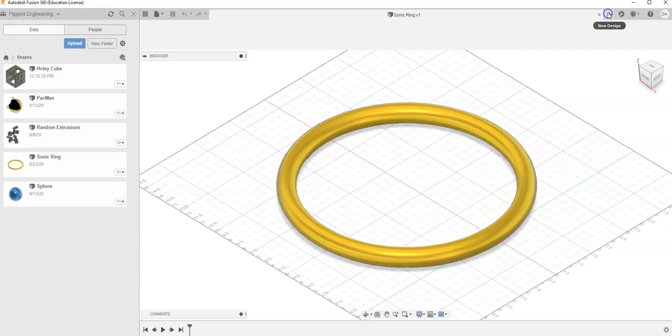We had some fun playing with the revolution tool in the last few videos, but let's go back to our extrusion tool and let's try to create a sword. So let's start a new document and let's start a new sketch. And I want to start with the blade of a sword. So I want to go with the top view.

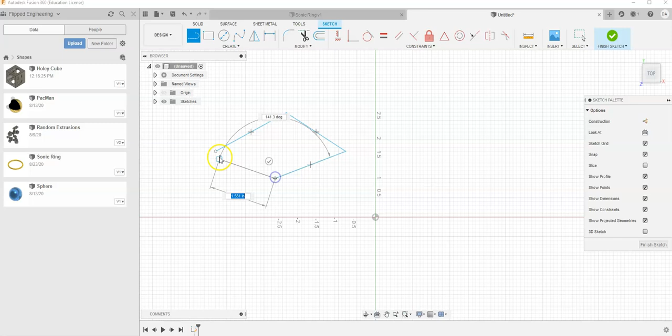And if you think about what the blade of a sword looks like from the top view, it kind of looks like a diamond shape. And so let's grab our line tool and let's sketch out a diamond kind of shape. And it doesn't matter if it's perfect, just make sure you connect it exactly on that last point at the end. Right click OK. And so if you look at my diamond, it's not perfect at all. But once we have the general outline drawn out, we're going to go ahead and make it perfect.

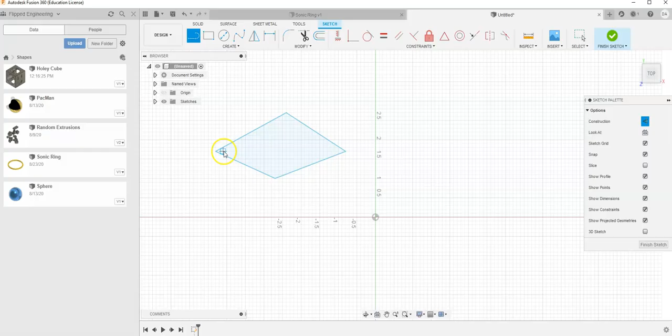And to do that, I'm going to introduce you to a new tool. It is called the construction line. So go ahead and click over here. Make sure you have your line tool still selected. And what I want you to do is I want you to connect from the left corner of my diamond to the right corner of my diamond with a construction line.

And you'll notice this construction line is not a solid line, it is a dotted line. And that's how you tell the difference between a construction line and what we call an object line or a normal line. And construction lines are actually really cool. What they do is they allow you to manipulate your 2D geometry without affecting your 3D features after you finish your sketch. And so let's draw one more construction line connecting the top corner of our diamond to the bottom corner. And then I'm going to right click and hit OK.

And the next thing I want to do is make sure that my lines are horizontal and vertical. And so I'm going to go to my horizontal and vertical constraints, and I'm going to click on my almost horizontal line and turn it horizontal. And you'll notice an error pops up. And this error pops up because it turns out that line was already perfectly horizontal. And so what it will do is either turn it horizontal or it'll tell you that it's already horizontal.

And so let's do the same thing with our almost vertical line. Let's turn it vertical. And so that one actually switched to a vertical line. And so again, if it was already vertical, it would just tell you it's already vertical, or it'll turn it vertical for you. And so right click OK.

And then the next thing I want to do is I want to make these four outside lines of my diamond equal. And so I'm going to find my equal constraint. And I'm going to tell these two left sides to be equal. And I'm going to tell these two bottom sides to be equal. And finally, I'm going to tell these right sides to be equal.

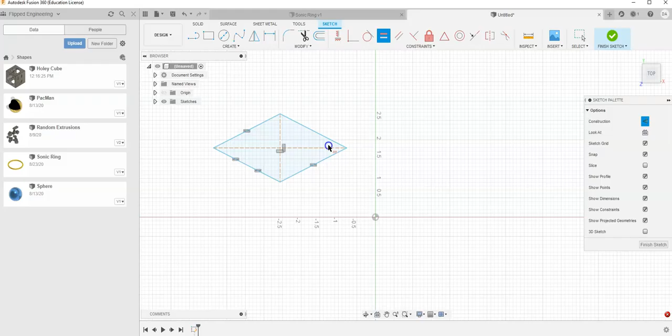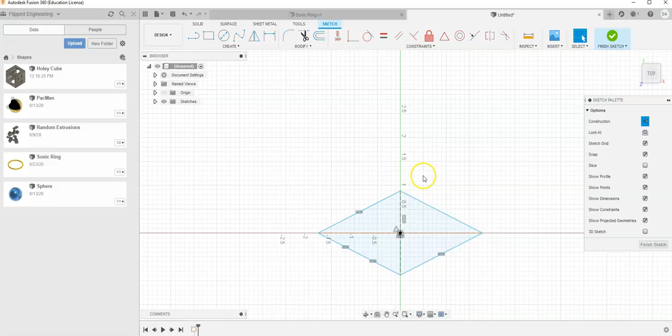And next, I want to put down a point at the intersection of these two construction lines. And so I'm going to hover over here at Create and go down to Point. And I'm going to place a point right here at the intersection of these two construction lines. And I'm going to tell that point to be coincident with the origin. Right click OK.

And then the last thing I want to do is give this diamond its size dimensions. And so I'm going to go up here to my dimensioning tool. I'm going to tell it from left to right to have a width of 2 inches.

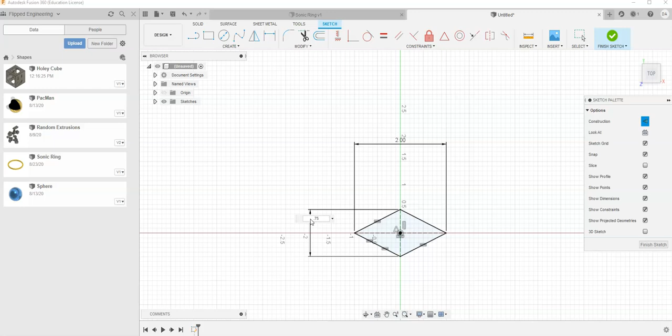And I'm going to tell it from bottom to top to have a height of 0.75 inches. Right click, cancel. And now I have a fully constrained diamond. And so I'm going to go to Finish Sketch, go to my Home View, and next we'll hit Extrude.

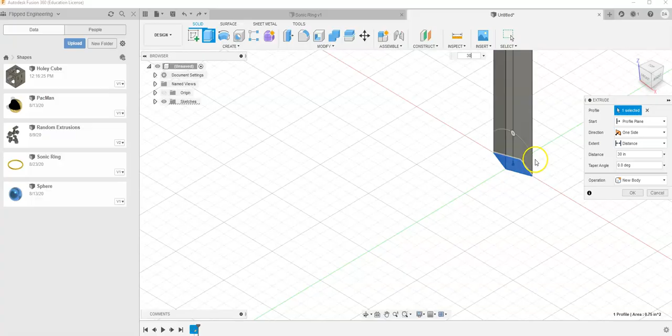And I'll think about the length of the blade of a sword, and I'm going to tell this to be 30 inches. And I'm going to zoom out to look at what we got here. And if you look, it kind of looks like the blade of a sword. But to make it look even more like the blade of a sword, I'm going to show you a new aspect of extruding called a taper.

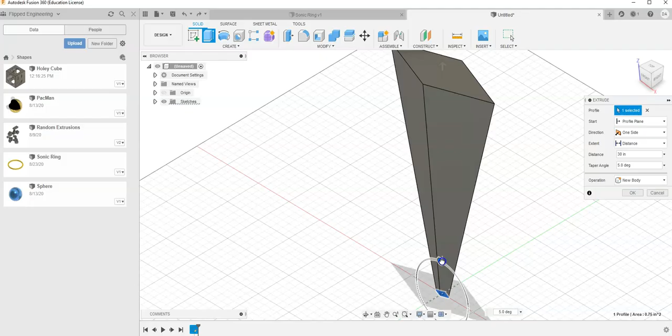So click on this circle and you can drag it to the left or you can drag it to the right and you can see what happens. It angles your extrusion outward or angles it inward depending on which way you go. And so if I want to switch back to length, I can click on this arrow or I can click here. I can also change the taper angle. Here's distance right here. I can change my taper angle right below it.

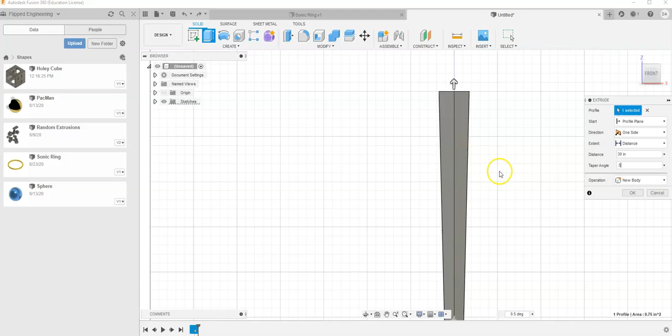I'm going to give it a taper angle of just 5 degrees because I just wanted it to taper out a little bit. And if I look at it, it looks like it tapers out a little bit too far. Maybe if I make it half a degree. So I'm going to go to 0.5 and see how that looks. And that actually looks really good for the blade of a sword. And so I'm going to hit OK.

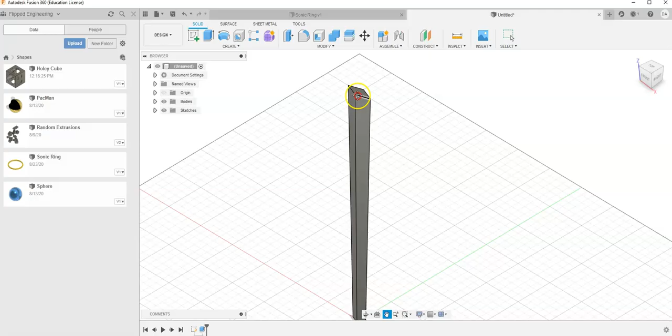But I also want a point at the end. I want it to come out. I want it to taper out. But then I want it to taper back in to make that sharp point at the end of a sword. And so actually what's really cool in Fusion is I don't have to start a new sketch. I can just extrude off of a shape that's already there.

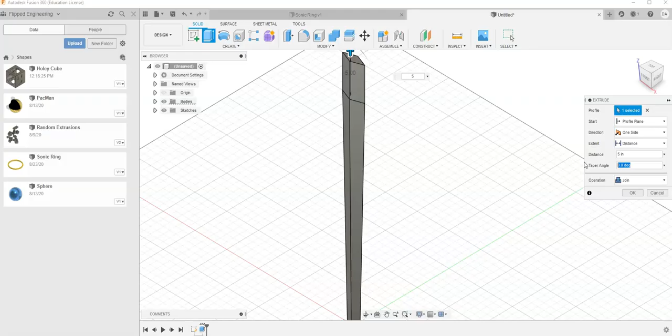So I'm going to just hit the extrude button and select this face, and it'll extrude this shape out that's already there. And so I'm going to select 5 inches for this, and I'm going to add a taper angle of, and I don't want it to go out, I want it to go in. So I'm going to say -5 degrees inward.

And if we look, that looks right, but it doesn't have that point. And so maybe let's see what happens if we double it. Let's say -10 degrees. And that actually looks really good. It looks almost exactly like the blade of a sword. I'm going to go ahead and hit OK. And then all we need to do is add the guard and the handle to the sword.

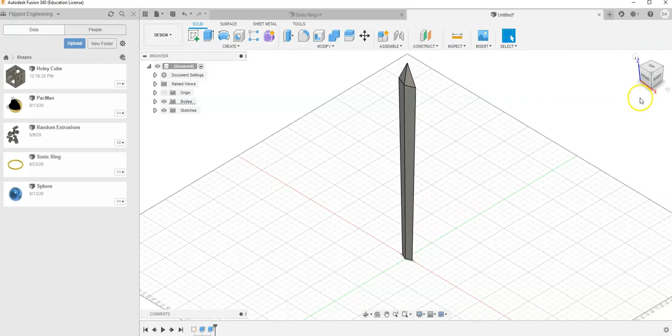And so let's go to the bottom of this and let's start a new sketch on the bottom of this blade. And I'm going to find my rectangle tool. And you'll notice that when I try to add a rectangle somewhere in the middle, it wants to magnetize to the shape. I'm actually going to draw my rectangle over here to the top left, just so I can see what I'm working with without these other shapes getting in my way. And after I add its dimensions, I'll center it back to the center of this blade.

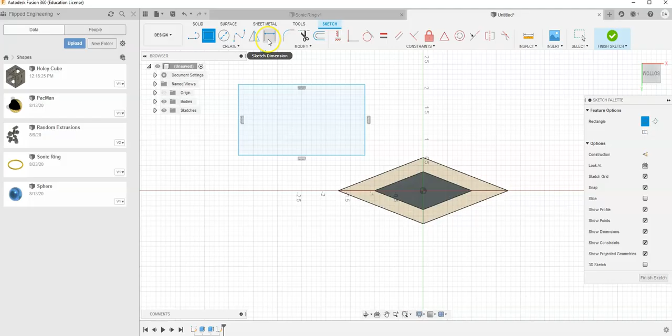But let's go ahead and add some dimensions to this thing. I'm going to tell this handle, or I'm sorry, this is the guard. I'm going to tell this guard to be 5 inches wide, and I'm going to tell it to be 1 inch tall. I'm going to right click and hit cancel.

I'm going to grab my line tool and select my construction lines again. And I'm going to find the center of this edge. And once it pops up with that little triangle, I know I have the center. I'm going to click and drag all the way across and find the other center.

And then I'm going to do the exact same thing up here. I'm going to find the center of the top and bring it down to the center of the bottom. And so you should be able to see the difference between my construction lines and my object lines of my rectangle. If your rectangle is made out of construction lines and not object lines, you will not be able to extrude it. So let me show you what I mean real quick before we go any further.

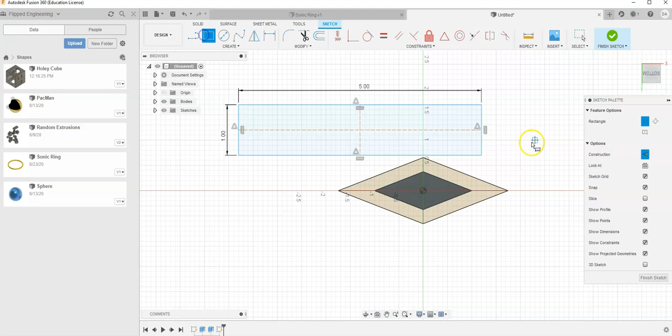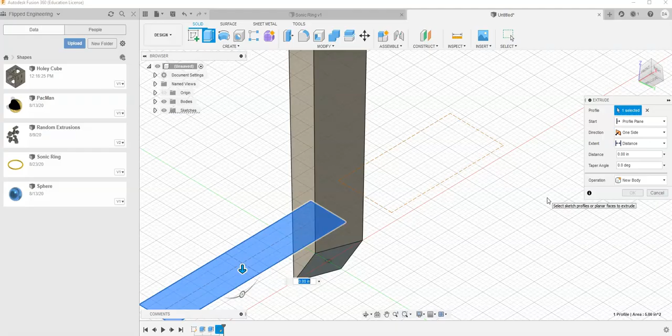I'm going to draw a rectangle with construction lines on. And so now I have this construction line rectangle. I'm going to finish my sketch. And when I try to extrude this, I can extrude this shape pretty easy, but I cannot extrude this construction line. That's the point of construction lines. They're just there to help you draw your sketch, but they can't be used in the 3D world.

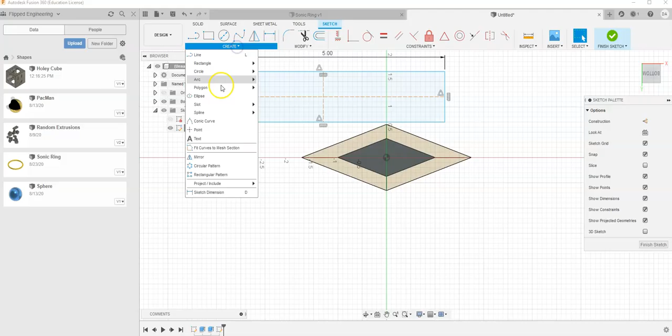And so let me go back into my sketch. Let me find my last sketch here and edit it. And we'll move back to the center. I'm going to delete this construction line rectangle. And then I'm going to finish this sketch. I'm going to find a point tool underneath Create. I'm going to put a point right here in the center of these two construction lines. And I'm going to tell that point to be coincident with the origin. And so now I should have a fully constrained rectangle.

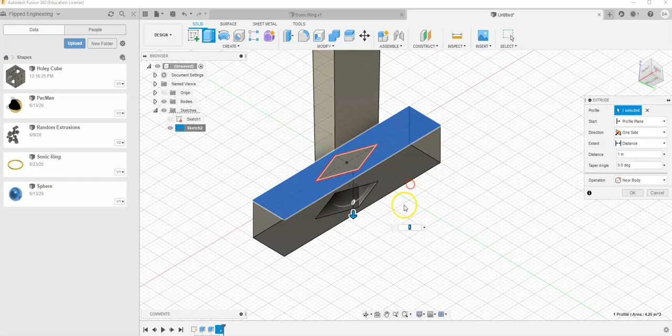I'm going to finish my sketch. And I'm going to extrude that rectangle downwards 1 inch. And if you notice, it automatically cut out that diamond. That's an easy fix. I'm just going to select that diamond. If you didn't do it, if you hit extrude and you bring it down 1 inch and you hit enter before you recognize the diamond, that's no big deal.

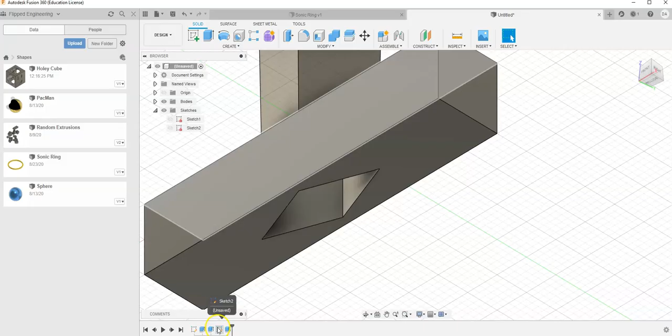To fix that, we can just go down here and find our third extrusion. If you look, we have our first sketch, that original diamond, our 2 extrusions that we based off of that sketch, and then we can find our second sketch, that rectangle we just used, and then the extrusion based on that rectangle, the extrusion 3. I'm going to right click on this and I'm going to go to edit feature. And I just want to add this diamond, so I'm going to select that as well and hit OK.

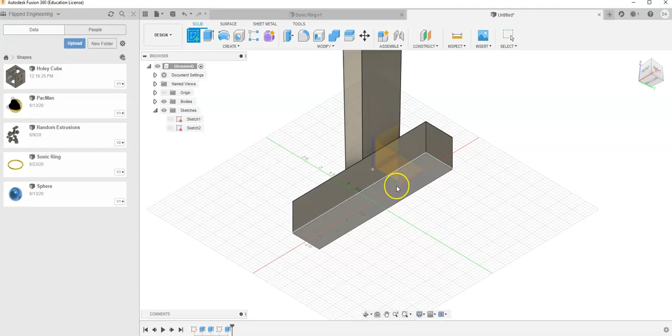And now you can see we have the guard of our sword. We just need to add the handle. And so I'm going to start a new sketch on this bottom face. And to sketch my handle, I'm going to use a new type of shape. I'm going to go over here to Create, find Slot, and I want to go to Center Slot. And again, I'm going to draw it off to the side and center it later.

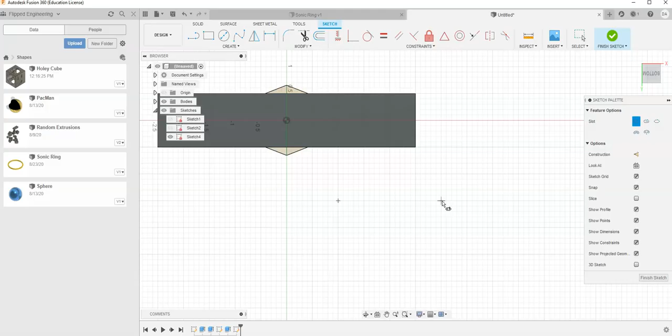And so I'm going to click, drag to the right so it's horizontal, click again, and then drag up and click one more time to create my slot. And then right click OK. And I'm going to tell this slot to have a width from center to center of 0.75 inches. And I'm going to tell it to be from bottom to top 0.5 inches.

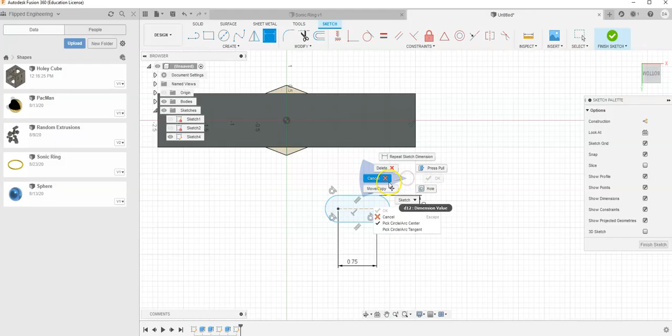Right click cancel. I'm going to go to Create, find my point, and put a point down right in the center of this slot. When you see that triangle, you know you're good. I'm going to go to my coincident constraint, and I'm going to tell this center point to be the same as my origin. And I have a fully constrained slot.

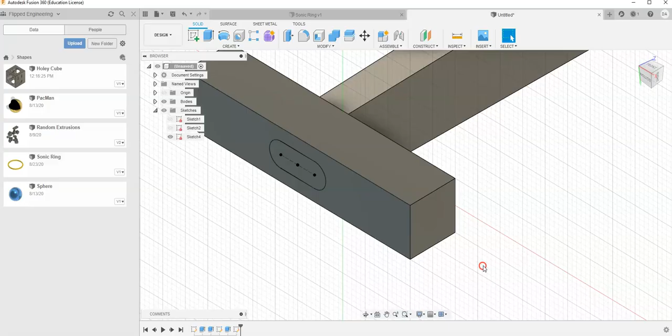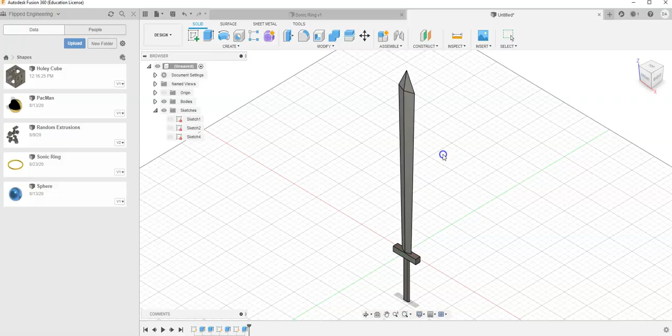I'm going to finish my sketch, look at it from another angle so I can see what's going on, and I'm going to hit extrude, find that shape, and I want to tell it to be 8 inches long. Hit OK, hit the home button on my view cube, and there's my sword. The last thing we need to do is hit save, and let's just call it sword. Hit the save button, and we are finished with this shape.